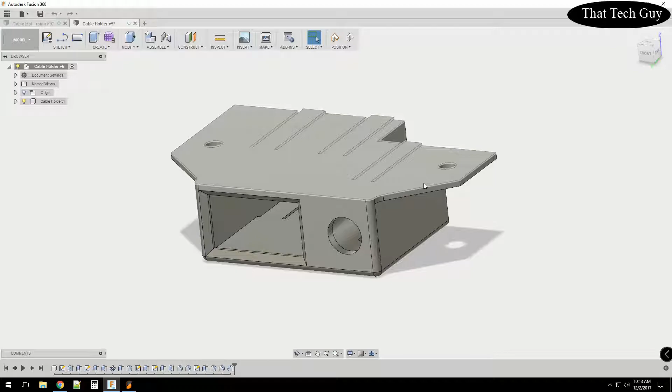And what was happening, my computer has a very noisy front audio panel, the one I just currently built. So I figured I'll create this and mount it under my desk, and it's actually going to be a little bit more convenient. I wanted it out of the way. I didn't want cables coming from the back of the computer. So, anyways, I printed this part.

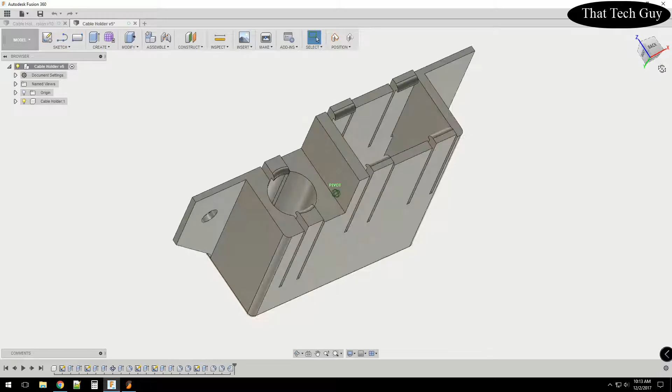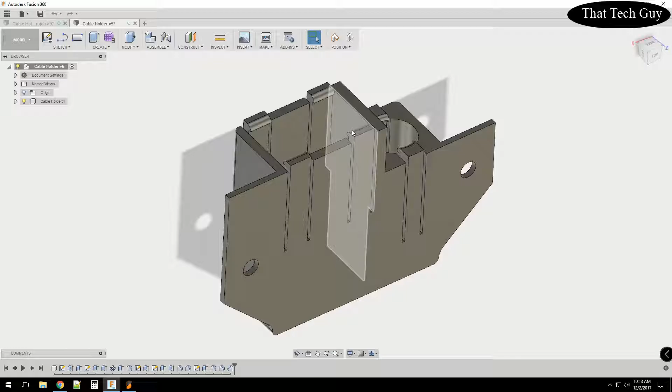This part uses basically little clips on the back that retain the cables. The problem with this was that there's a little bit of an overhang, which 3D printing sometimes doesn't like. Although this was pretty minimal and the printers are usually able to handle this, the retention clips on this particular model, I'm not sure if they would work very well with usage because you're going to be inserting a USB device back and forth. So the clips themselves, how long are they going to last?

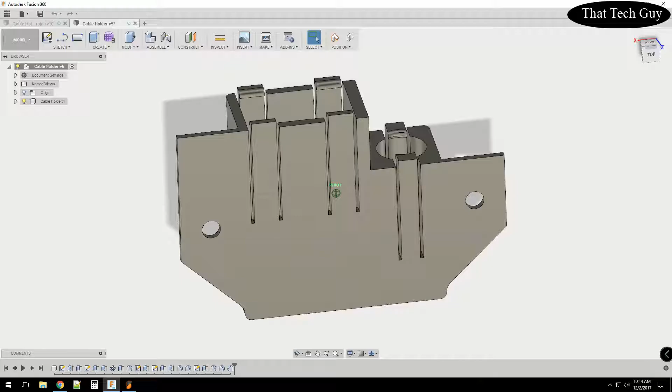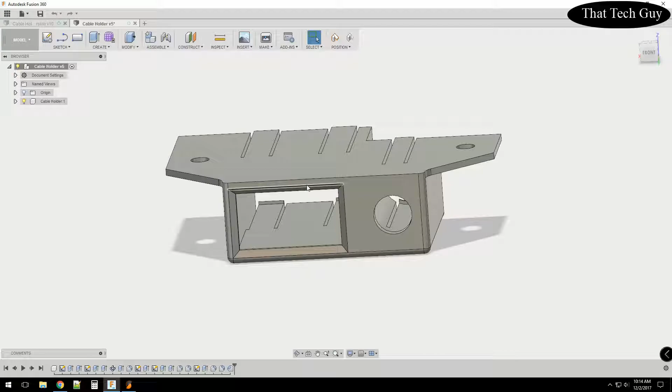So I wanted to make this a solid back here as well as the back of this one. And by the way, when I print it, I print this in this orientation. So this is the bottom of the printer, and it prints upwards. And the reason I do that is because I know this is the face of the device or the mount, and I want it to look good. And anything that's flat on the print bed is always going to look good. The other reason is if you print it this way, you're not going to need supports. The printers are able to go gradually outwards on a print.

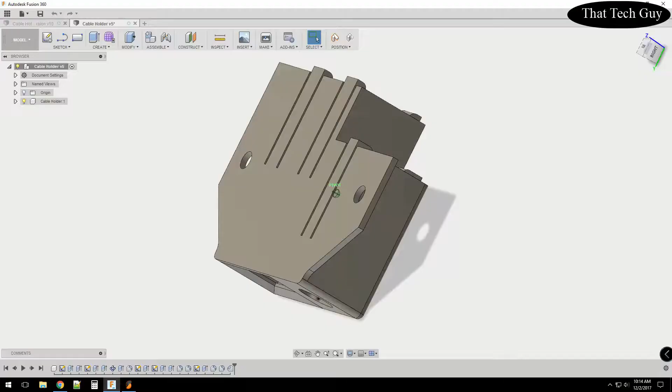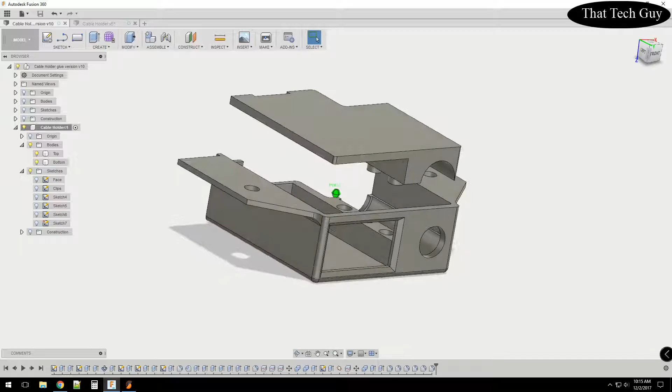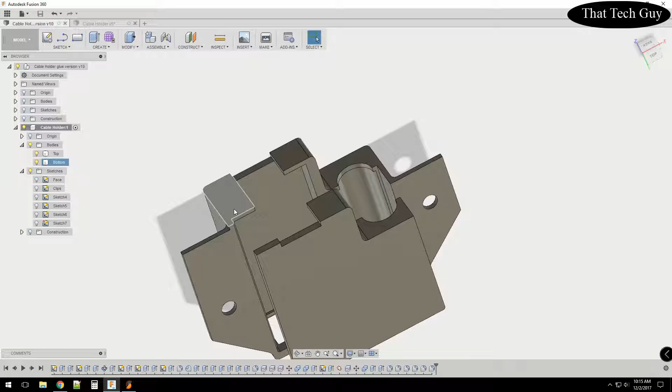So what I want to do is basically have this print friendly. But now I have this major overhang right here, which I don't think the printer is going to be able to do. I have an overhang right here. This one over here on the bottom portion of the mount is not that bad, and I think the printer will be able to handle this one. I'm a little worried about these two if I print it in this orientation.

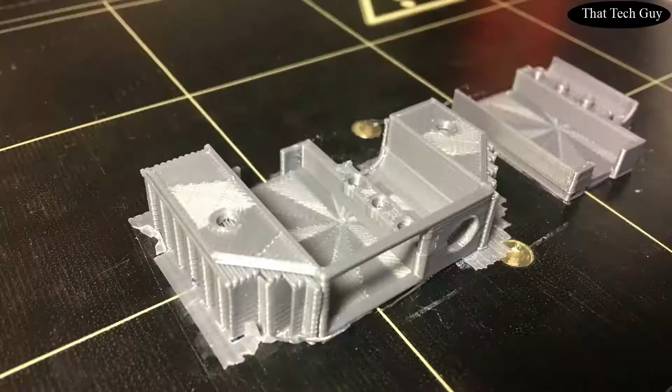If I print it in this orientation, well then the mount to the desk is going to be up in the air, and this is going to require support. And I hate printing with support. Supports just put little defects on the print job. And in this particular model, I don't think it matters that much. But if I can do this without printing with support, that'll be great.

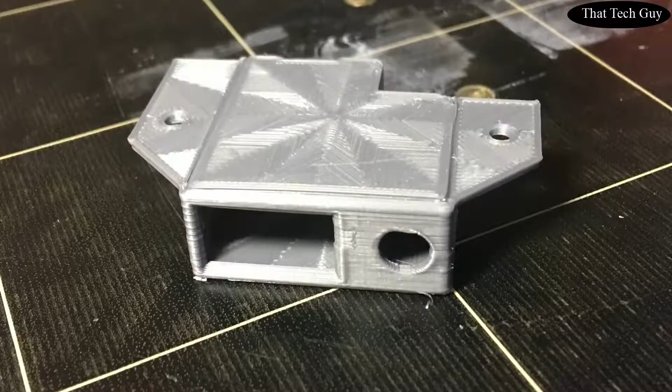The other problem is the layers will be going this way. And the problem with that is that this is the front face, and I want the front face to look good. And in order for me to do that, I have to print it this way. So here's what I got to do. This is a simple fix. What I'm going to do is I'm going to print the bottom part. So I'm going to disable this top part. I'm going to print the bottom part like this. And then I'm going to print the top part.

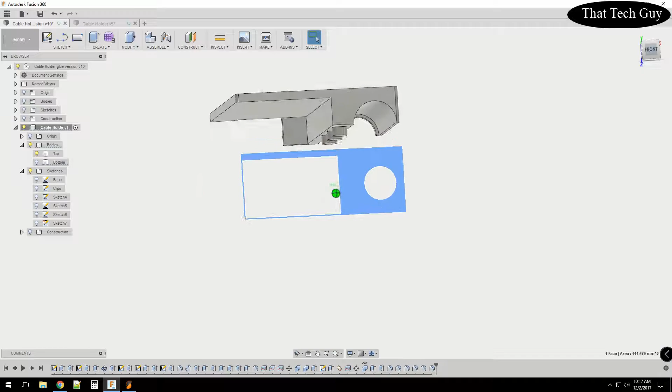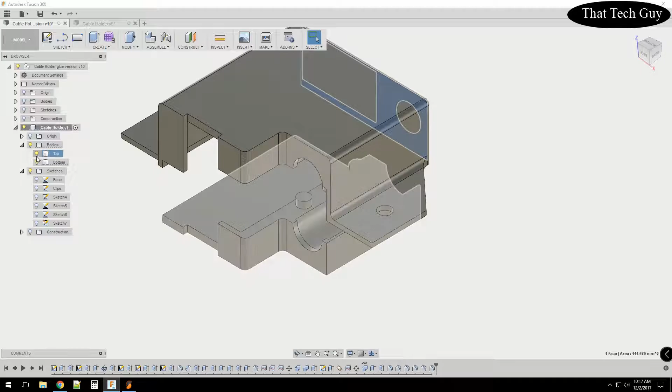Let me rotate it front like this. So it's going to print upwards this way. Now the top part you're not going to even see at all because it's going to be in the device. So let's go back. Let's see how we're going to fix this. First of all, I'm going to disable the top for right now. And let's look at these two overhangs. First thing I'm going to do, let's make sure I'm in the correct one.

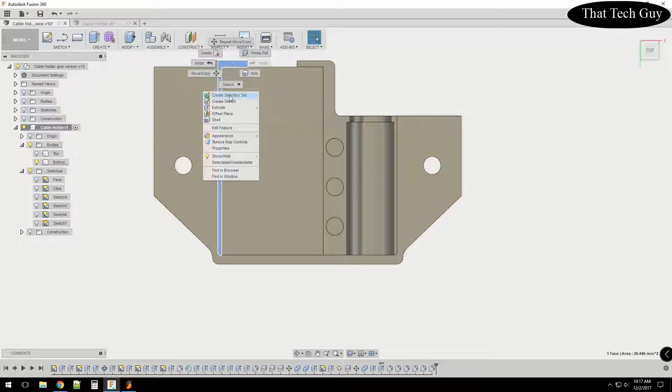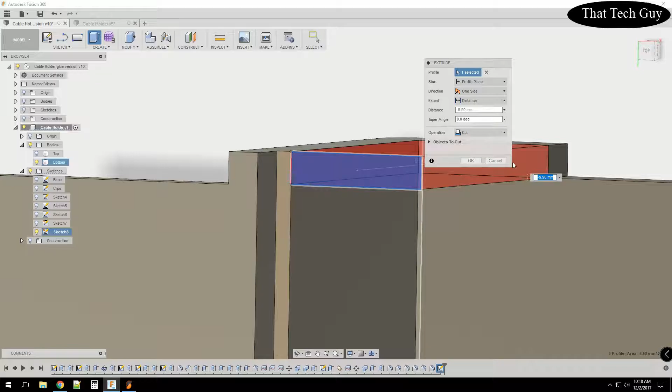I am. I'm going to create a sketch here. I'm going to just go a line straight from here to here. Enter. All right. Now I'm going to stop that sketch, and let's take a look. I'm going to extrude this all the way to here, which is 9.9. So I'm going to copy that 9.9. Okay. So now I don't have to worry about that. But I got to fix that by putting that to the top model. So I'm going to bring the top model up.

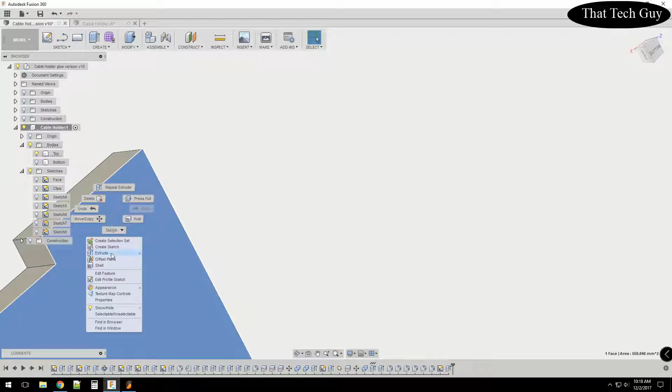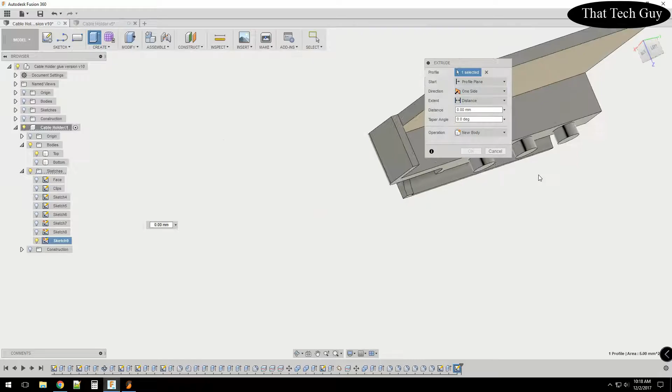Take the bottom model down. I'm going to create a sketch on the bottom. Sketch a line from here. Oops, here, it's fine. Just trim that. Oh, good. And then I'm going to extrude that. And we probably should zoom out a little bit, move this out of the way. We're going to extrude that. I believe it was 9.9.

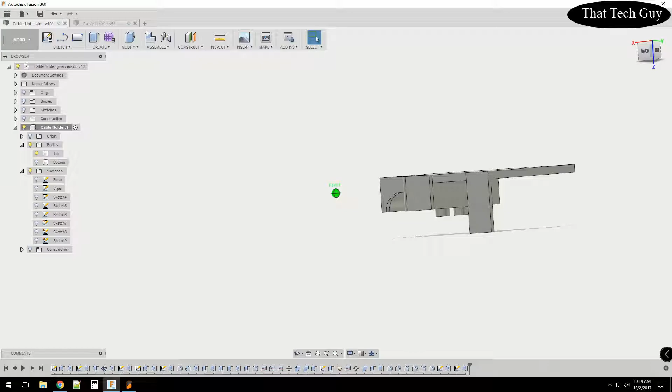Boom. So now when this prints, remember it's going to be printing this way, it's going to have the holder. Okay. And also you can see these little 3 pegs is what's going to hold this in so it doesn't slip out. All right, so we took care of one, so let's take care of the other.

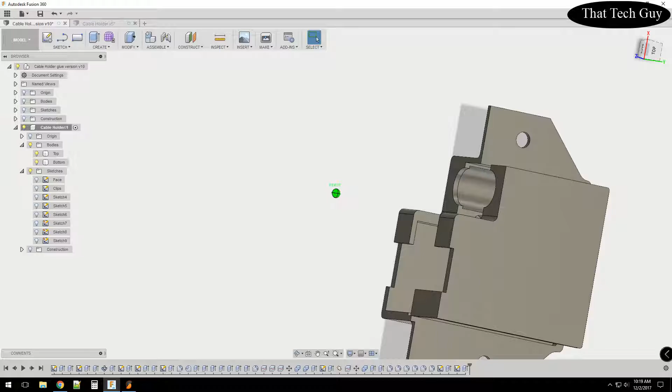Okay, once again, we're going to do the same thing. This one's going to be a little interesting. We'll see how it goes. So once again, I'm not going to hide anything this time. I'm going to create a sketch. I'm going to have to hide the top. And zoom in. Sketch line.

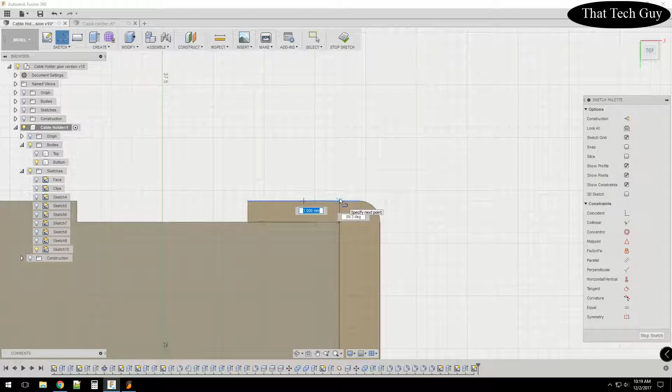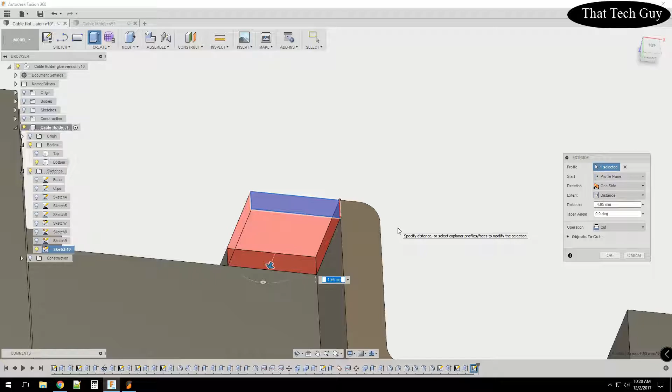Oops. We want it perfect 90. Enter. Sketch. Trim. Where's the trim? All right. Stop sketch. And we're going to extrude that down to, click down here, it automatically goes to that surface, so 4.95. Okay, and I copied that value. Once again, if we print it, look, there's no overhangs, and that will print perfect.

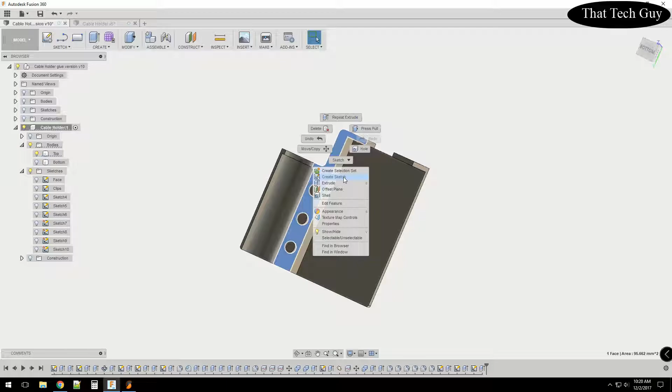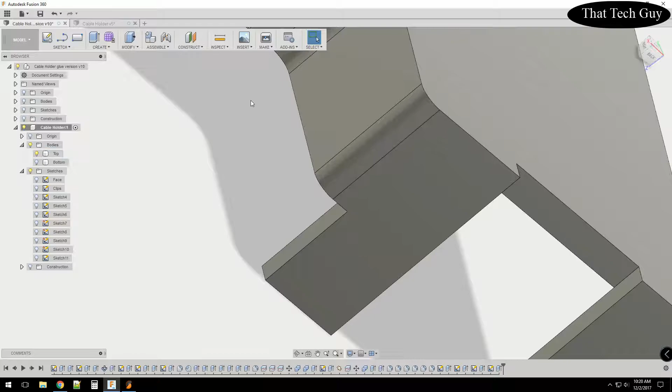All right, let's go to the top now and do the same. Create sketch. Line. And technically, I could just stop sketch right there and extrude. This is going to be a positive. All right, there we go. Let me bring back the bottom model. Oops. Then click on the light bulb. And everything looks great.

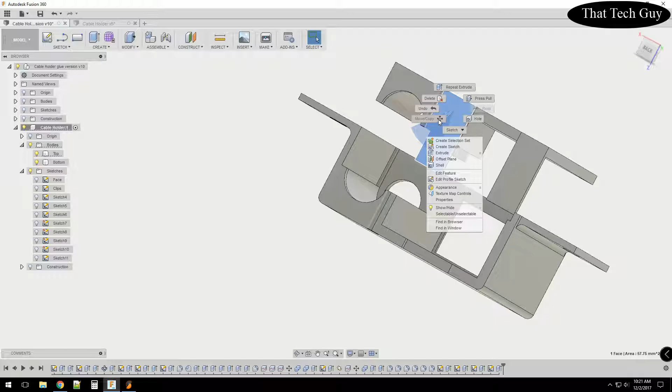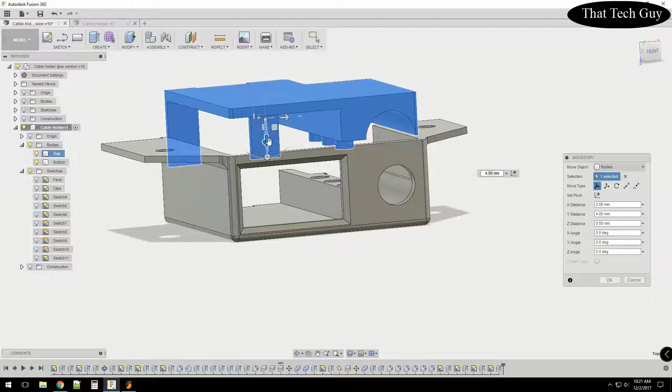So when we put this together, I'm going to go to bodies here. I'm going to move it. Oops. See this free move. It's fine. When we move it into place, bam. So yeah, that's a little about optimizing for 3D printing. So right now, if we take off the top, hide the top, oops, escape.

We're going to hide the top. If we print it this way, we have very little overhangs. We do have some here, but usually circles, they do okay. So I'm hoping that doesn't cause too many issues. And we'll see. So let's go ahead and print this and see how it turns out.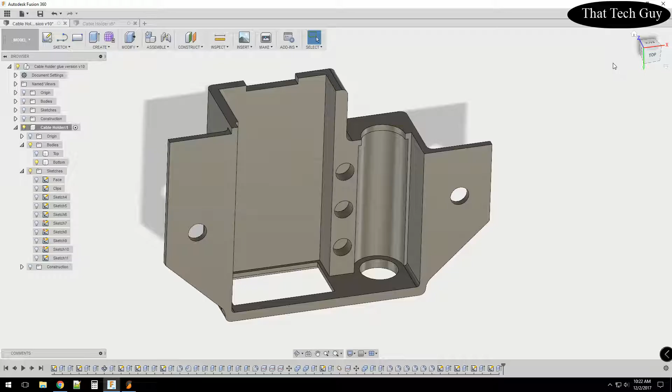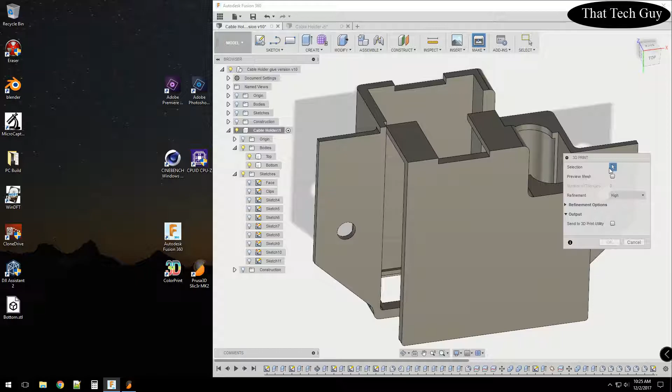Okay, so to 3D print, I'm going to File, 3D Print. Then I'm going to select the part I want, which is the bottom at this point. Click OK. It's just going to save it to my desktop. And I'm going to do the same thing. File, 3D Print. This object, and it's just going to save to my desktop. Notice that it's using the same name as the bodies, which is fine. I like that. So now that the files have been saved to the desktop, we can move on to the 3D printing software.

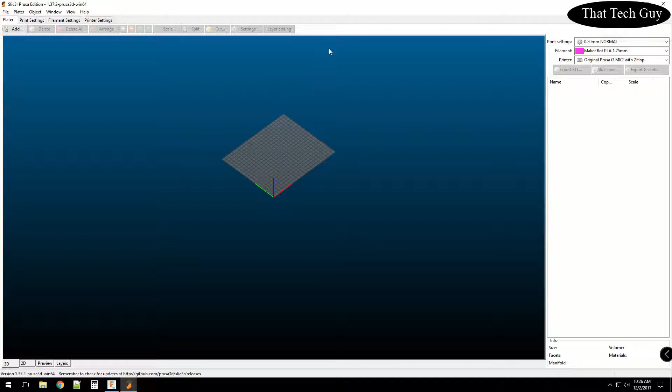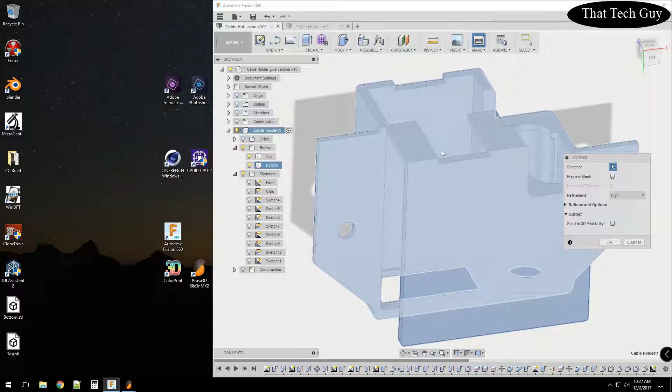All right, move this over here for a second and move this over. By the way, if you have a component that has lots of components that you want to print in one file, you can actually select the top body and do File, 3D Print, and it'll create an STL file with everything that's under that container. Just so you know, but we don't want that because then you can't rotate them individually. That's if you have a really big model that you model different portions to, but they're going to be rigid anyways. That's when you want to do that. All right, back to Prusa.

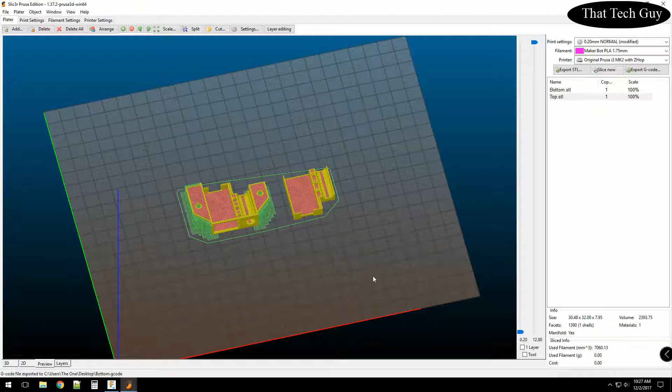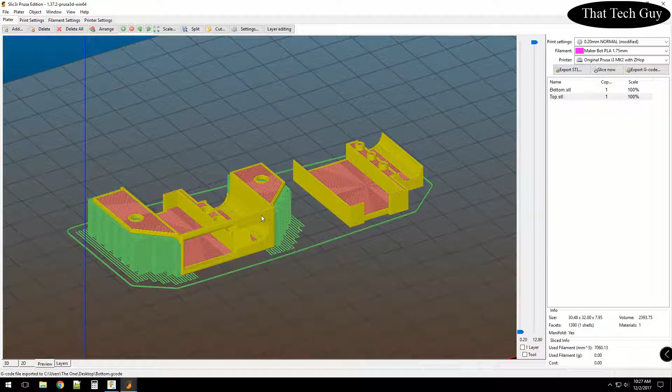I'm going to delete this one. Well, this was a previous one that I was working on. And as you can see, I didn't like the way it printed with all the supports, and it's just, I don't know. The hole also didn't come out very well on the face of the panel. So like I said, I wasn't really too happy with this result, just from the standpoint that I had these supports that created little defects on the bottom of that, and the face wasn't perfect. So let's close this one out.

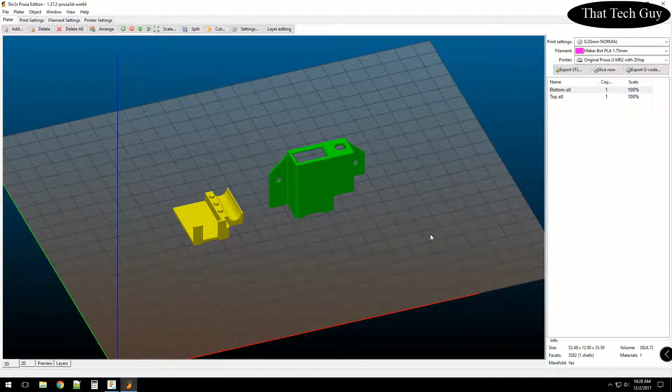All right, so here we are, and I brought this into the slicer. What we're going to do is we're going to rotate this body around X. I want to say 90. Nope, I was wrong. It was negative 90, but that's okay. We'll rotate it by X negative. Oh, actually, it doesn't even need negative. Just 180. There we go. So this is how I want to print this. No supports, just straight up and down.

Let me check my printer settings. Make sure I don't have. Let me check my infill. I think I can do infill of 10% on this part. Although I think there's very little parts that are going to be infilled.

No skirt, one loop. Yep, that's fine. And then support material is off. Good. And then my filament settings. I'm just using PLA here. This is not a wear part or item that's going to wear or going to be out in the sun, so PLA is fine. All right, so let's go ahead and click slice now.

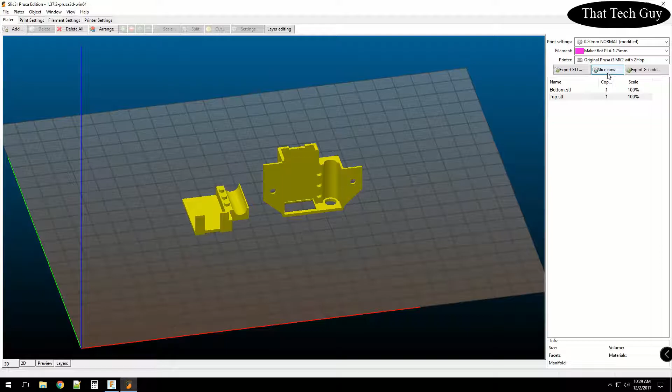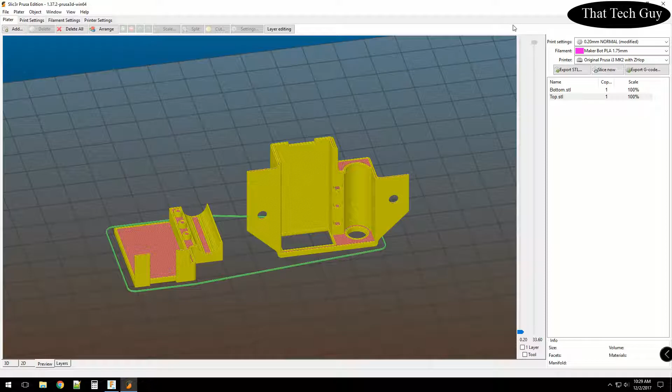And that should be sliced. It is. You just have to go to the preview tab if you're not aware of how Slic3r works, or at least the Prusa version. And this is how the printer is going to print this particular item. Like I say, I don't see anything that this won't be able to do beautifully. So the face is going to come out gorgeous.

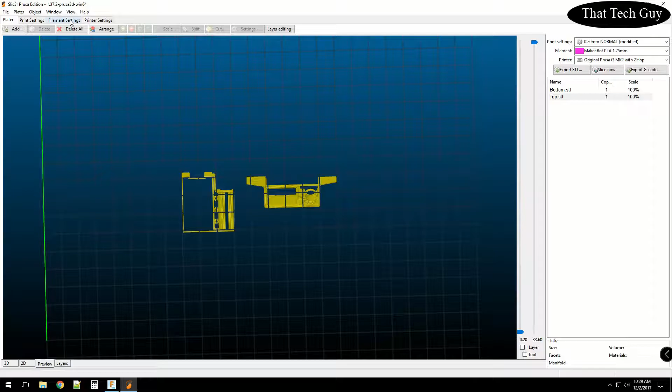Oh, you know what? One thing I will change. Let's see if this will work. I'm going to change the top and bottom fill to, no, was it this one or this one? See if that makes it look any better. Print preview. Okay, let's slice it again. Change the pattern a little bit. Not really sure which one I like better. Oh, I'll keep it with that one. Okay. So anyways, so there we go.

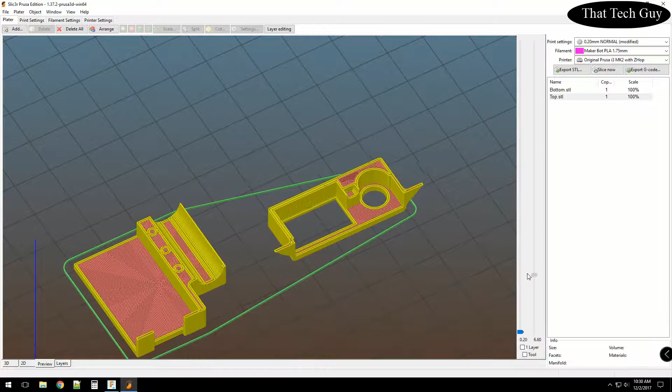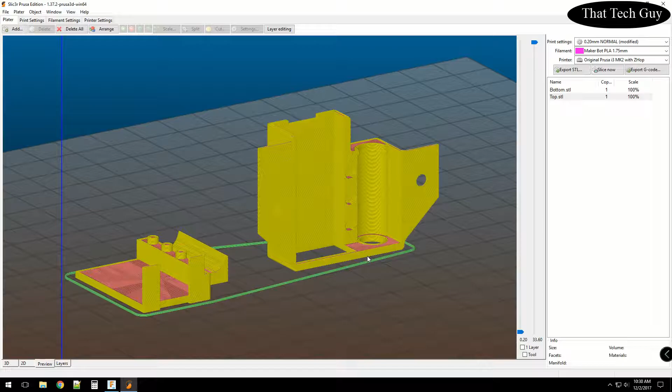So now that I'm happy with the way it's gonna print, yes, I understand there's overhangs here, but the printer will be able to handle these with no problems. I already printed this once, a different version of it, the one with the clips originally, and it works just good. So we know we have what we want. So let's go ahead and export this file. And it's going to export to G-code. You can call it whatever. Bottom is fine for me.

I don't like keeping G-code files because they're very particular to the filament you're using. So I delete them after I use them. I keep my CAD drawings and I keep my STLs, but G-code, I just don't feel like naming them PLA or PETG, and then what brand of PLA and PETG. It's just not worth it. So I'll delete that after I'm done.

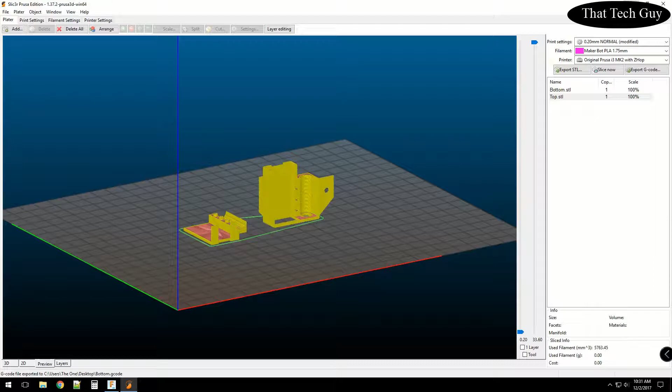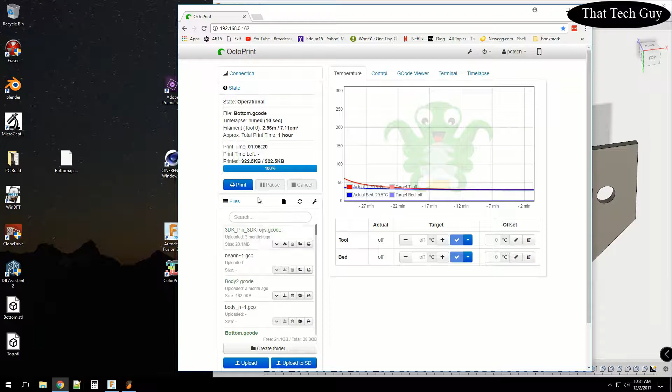Now, I could take this file that we just created and put it on an SD card, send it to my printer, and go from there. But I have OctoPrint installed on a Raspberry Pi, which basically allows me to do it wirelessly through the network. And there we go. So here's the Raspberry Pi, printer's connected. We already had a different bottom one. That's the one I showed you pictures of that I wasn't too happy with, so let me delete that one. All right, and then we're going to copy this one over

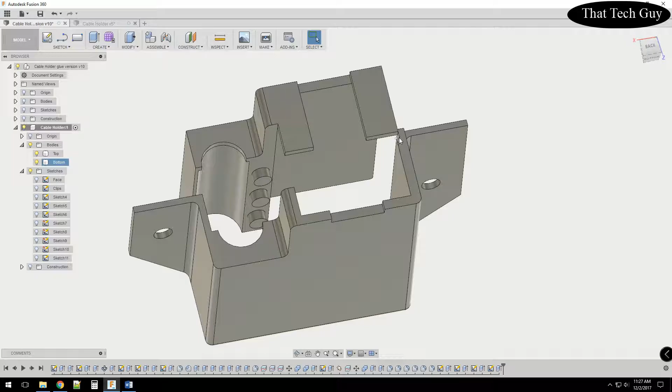and click print. So I had to cancel the print because when I was looking at the model again, I saw a mistake that I made, which happens all the time. So what we have here is that when I extruded this out, I forgot to take into account this lip, which once again, that's simple to fix. I just forgot to account for it. So if we would have printed this out all the way, it obviously wouldn't fit because it would have hit against that. So what we can do to fix that is we're going to create a sketch here

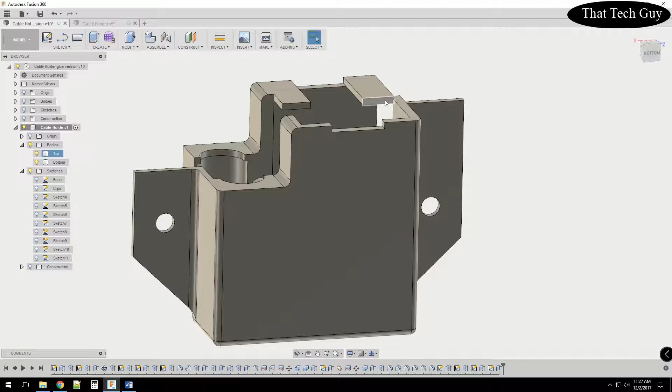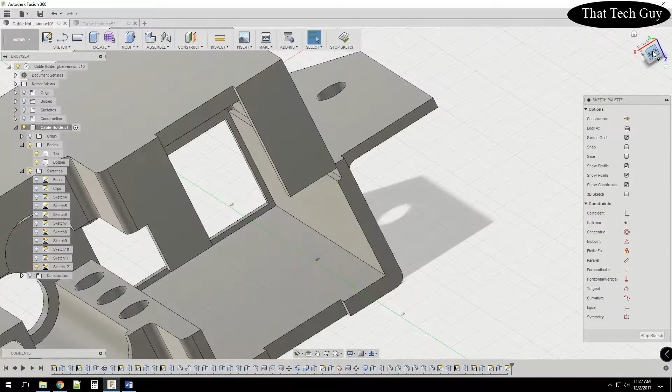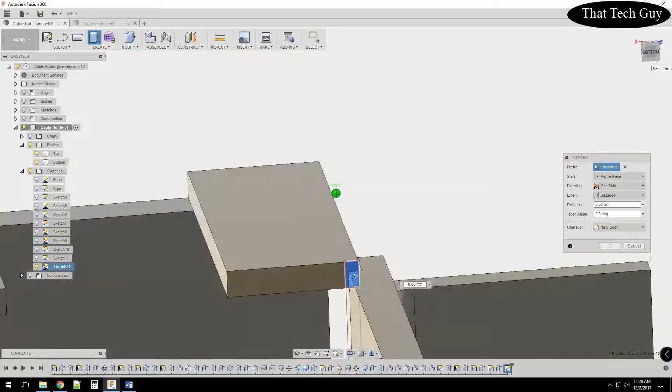on this part. But what I want is a projection of a couple lines. So let's first of all turn on sketch. Sketch is on. And I want to hit P for projection. And I want to project this right here. Click OK. And what we could do now is extrude that all the way to here. So we can extrude that to right there. Click OK.

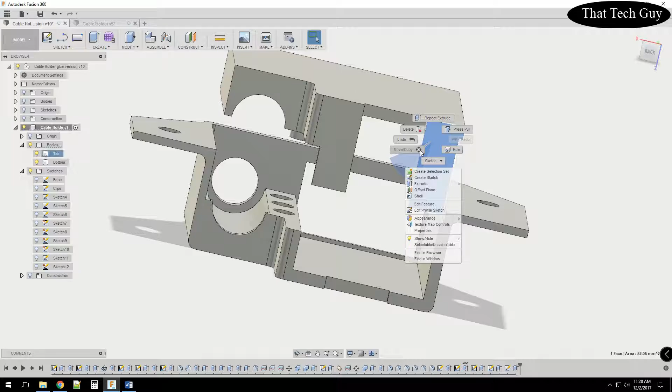And now, if we move this, oops, click on bodies, move this, free move. We move this, now it should fit. I would make sure I didn't miss anything else. All right, back to printing.

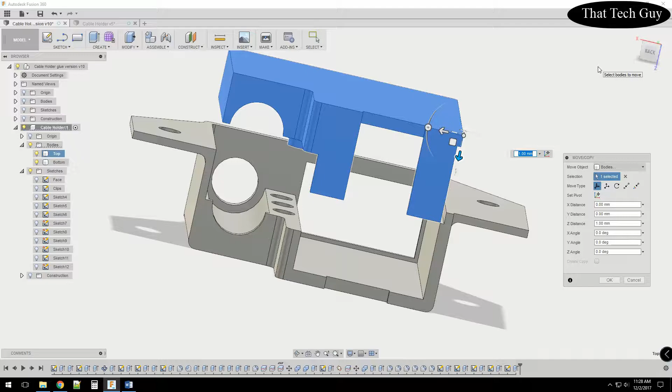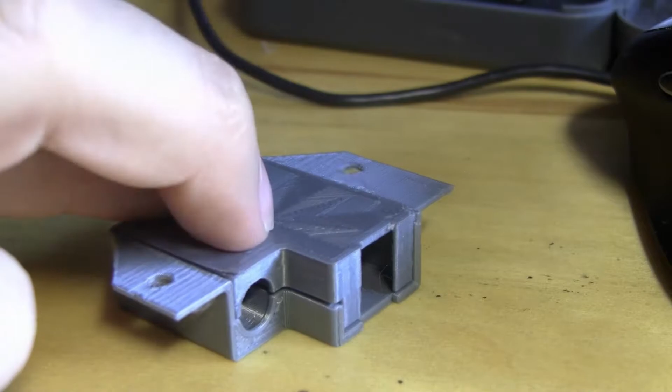Okay, here's the finished part, finished printing from the printer. And as you can see, everything printed pretty decent. I did mess it up taking it off the printer right here on this corner. But other than that, that's not going to even be seen. Like I said, it's going to mount to the desk on the downside.